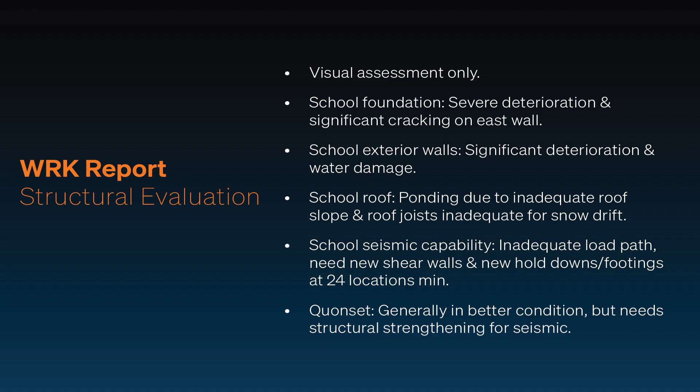And then the Quonset hut, again, is a visual assessment. It's in slightly better condition, but still leaves a lot to be desired for seismic engineering.

Okay, then we got a hazardous materials report. This was just done this year in August, September. Not a lot of great news here.

As for a lot of old buildings, the mastic in the flooring all has asbestos, so all of the flooring has to come out. The roof has asbestos, so the whole roof has to get replaced. The drywall, the texture, the tape, the mud compound, it all has friable asbestos, which I found surprising, but that means all of the walls have to go. All of the drywall's got to go at minimum.

And the exterior walls, again, with the water intrusion, there was a lot of visible mold. So even if we could save the drywall, we'd have to remediate it. If we can save the studs, it all has to get remediated. It also adds risk - mold is not terrible to get rid of, but you have to get every little last mold molecule, and it's really difficult to do.

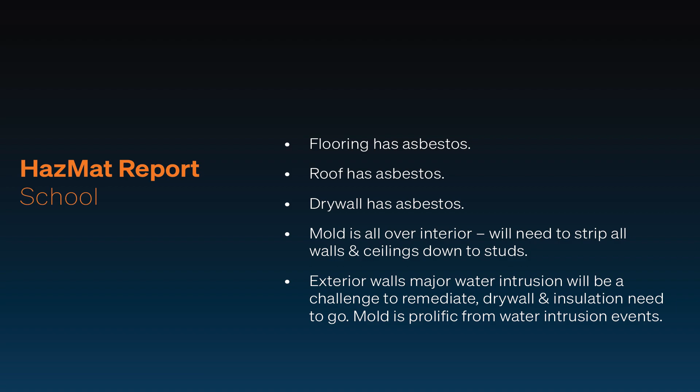And then the Quonset hut, similarly, we found asbestos in the silver paint on the roof. If you noticed, a fence went up around it recently, and that's due to the results of that report. It is friable asbestos, so as a caution, the city has put up a fence.

We're working with our consultant and DEQ to figure out, do we have to abate this immediately right now and remove the roof, or can we wait a couple months while we finish the design and figure out what the plan is going to be. So the fence is up as a precaution to just keep people out of the zone where that paint is.

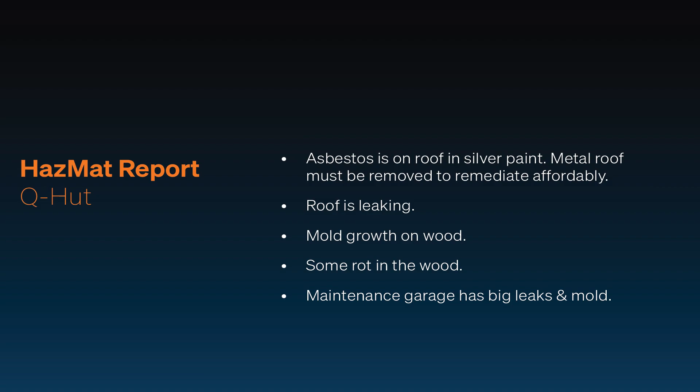Again, our roof is leaking there. There is visible mold growth, there is some rot, and then the maintenance garage part of the Quonset hut is in worse condition, has more leaks.

Okay, this is a different report. This is MTI, Materials Testing Inc. And they came out and did some testing on the concrete, and they go a little bit more in depth than just the visual assessment, but it wasn't destructive testing. They don't go in and take big chunks of concrete back to a lab and test it. We didn't take that step.

So what they found, again, kind of backs up what we found in the WRK report - lots of deterioration of the concrete. We have seen some differential settlement, which is not good. That means the foundations are moving opposite of each other in different parts of the building, or one area is settling compared to another.

We found there's a CMU wall that's cracking. So then they do this hammer test, they call it a Swiss hammer test. It seems a little silly, no?

Sorry, this is the carpenter's hammer - the carpenter hammer, oh I got you. So they literally go around with a hammer and they tap, and how it sounds can sometimes reflect the quality of the concrete - if there's voids in it, if there's deterioration, like if there's rebar that's rusting inside, it has this hollow sound. It doesn't sound like it's something that would work, but it does. I've seen it myself. So they can learn a lot just by tapping on the concrete and listening to the sound it makes. It's crazy, but it's true.

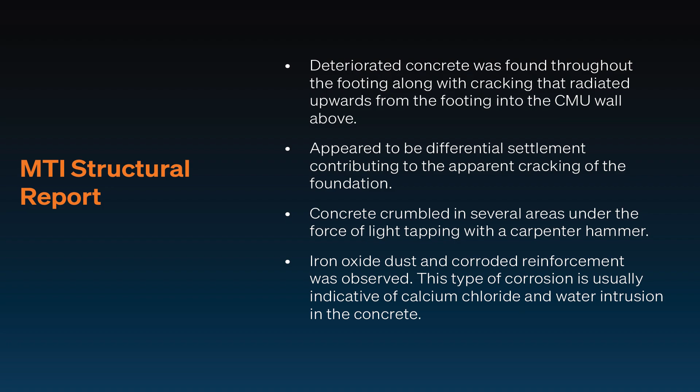Similarly, you can see here that 90% of the bar was lost. That's a lot of rust. You can imagine how long it takes to rust through an entire piece of rebar. So they saw that much deterioration in some locations. There's the Swiss hammer test.

So again, the minimum strength of concrete we generally use for buildings is 3,000 pounds per square inch, 3,000 PSI - that's generally bare minimum. Frankly, modern buildings, it's almost always at least 4,000 these days. And as an ex-structural engineer, I would be fine if a sidewalk was 3,000 PSI, but for a building and a foundation, you often want it to be higher.

The results of this were that a lot of it, when they did this test, was even below 3,000. So what we found is a large amount of the concrete just doesn't even meet the bare minimum standards for a sidewalk.

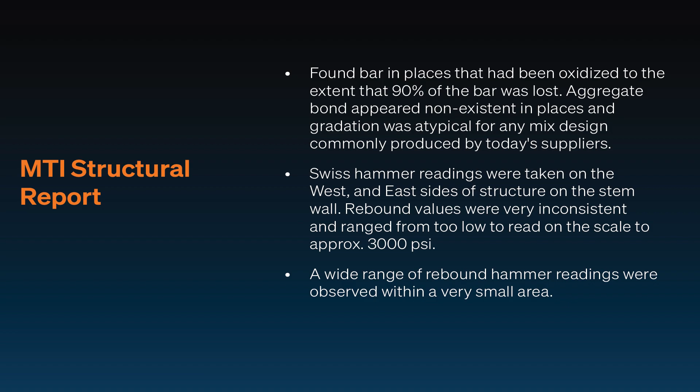That brings us into the geotechnical report. We just got a draft of it 2 weeks ago, and it was finalized last week. We're still trying to process and understand some of the information in it.

You might have seen they brought a drill rig out to the site. It broke down 3 times, otherwise we would have had the report sooner. They drill borings down pretty far, maybe 100 feet, I'd have to look that up. They did 5 locations on the site, then analyze the soil at each depth to understand its capacity to support a building.

What we found is we have a risk of liquefaction 30 to 40 feet below grade. That means in a seismic event, when the ground starts shaking, there are air voids in the soil profile that allow groundwater to start moving up, and now your dirt, which was solid, becomes soup. It is not good. I don't want to scare you, but it's a new item we just learned about.

What it means is that for the police part of this building, which has to be risk category 4, we cannot use simple spread foundations, which is ordinarily just digging a shallow hole and pouring in a blob of concrete with some rebar. For the police station, in order to get past this liquefaction zone, we're going to have to do these auger piles.

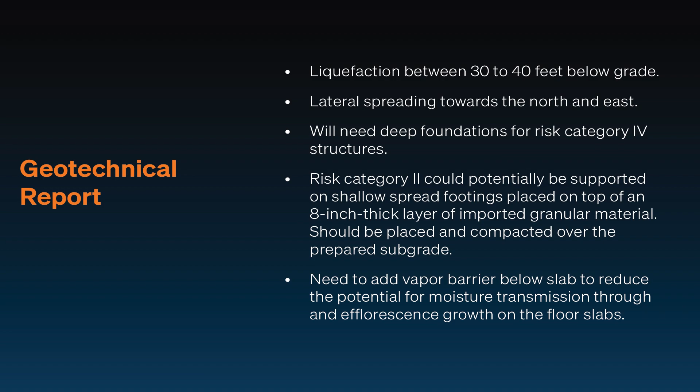And then lastly, there's no vapor barrier beneath the slab. Again, this wasn't done in the 40s. It's in every new building we do now, and it probably should be. So that's another element of why trying to reuse the slab is not a great idea.

More on the geotech report, summarizing that we need quite a big lift of compacted gravel below the footings, which we don't believe is there. This also dials in some minimum dimensions of what we think the foundations need to be, and how deep they need to be below grade.

I don't think we know precisely where the bottom of the footing is in the existing buildings. We do in some cases, where we have limited drawings that show it, but we don't think it's necessarily 24 inches below grade. So we also have a depth problem of where the existing foundations lie.

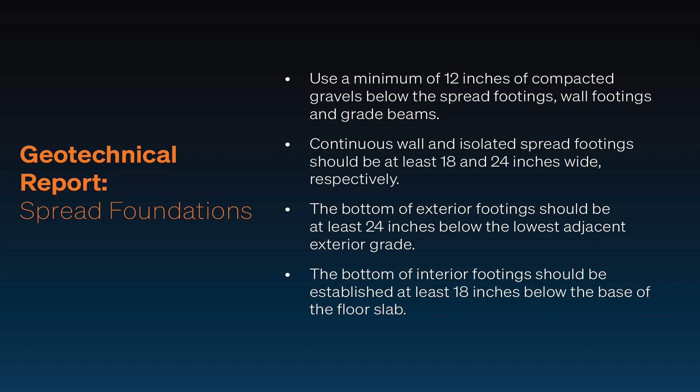Oh God, more geotech - I forgot there's this many slides on this one. This top note is just noting that liquefaction element. It complicates the foundation design; it's perhaps a slightly challenging site to design foundations for. We will need these continuous flight auger piles.

I haven't exactly done that one, but it's more like a spiral auger. They're used all over now - it's just a helical auger. It looks like something you'd put on a drill rig to drill out fence posts, and they're really easy to put in. Actually, it depends on the soil profile, how much rock you're going through - here it's mostly sand.

And it's not hard to get to 40, 50 feet. They're not outrageously expensive, as opposed to driven H metal piles that we do in the city, where they're banging metal into the ground. That's noisy, and so when I saw the word piles, I knew somebody would think it's the pounding kind. But don't be scared of them—it's pretty common in construction today, and most of the local excavators have the ability to do this.

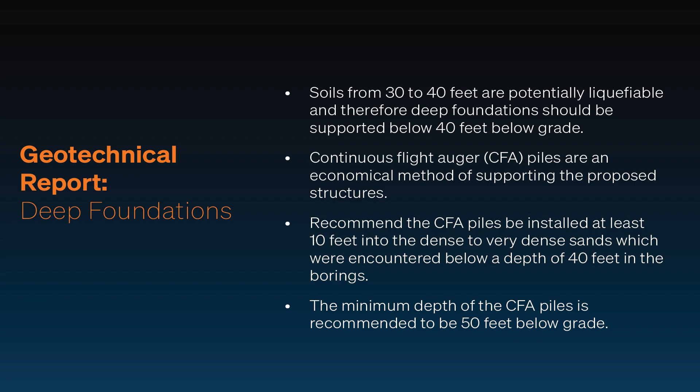Okay, sorry to interrupt. That's fine. So we've got the bottom note as the piles. We're looking at having to go down about 50 feet, right? So we don't have that in the facilities now.

That concludes a high-level summary of the technical reports. We will answer any questions on that later.

Did you want the fancy paper thing? Yeah, I want it now.

I'll just add that we will make the reports all available on the website. So they'll be all there if you care to read hundreds of pages of geotechnical reports.

Okay, so I have a really quick question. There was never a complete geotechnical report done before? Right, this is the first one that's been done on the site.

So when I came on, the team asked me to take a drive out there and put my builder eyes on it. I feel like I'm a good builder—I'm by far not the best builder ever. I think I always like to take my crew out, take a look at things before we dig too deep into it, and try to do a quick visual assessment. What do we think about the structures before we do anything?

I will say that I know reusing the buildings is one of the many potential goals, and I truly believe that's the greenest thing you can do in construction. We talk a lot about LEED and all these other things. Reusing things should be a goal of ours in life, so I think as a premise, that's a good place to start. But then we went and looked at the building.

So this is the south side. I went around and put up letters and placards to talk about where things were happening. Obviously, you can see all that longitudinal cracking—that's getting air and moisture into the rebar. What really happens there is the foundation probably still has decent bearing capacity; it can still take a load vertically. But what it can't do is take a load horizontally.

So when wind blows against the building, how does it stay up? It stays up with shear, right? And shear is done in wood frame buildings with plywood and hold downs. You put up a bunch of studs and tack plywood, and they tell us exactly how to nail that plywood onto the wall—6 inches around the perimeter, 12 inches in the field, all that jazz. That plywood then adheres to the studs and makes it rigid, so when something wants to blow over, all those nails resist that wish to tip the building over. But all that load has to get transferred to the ground.

And when it hits this condition, it's compromised—it can't transfer adequately all those loads. We also put in hold downs, which are big metal Simpson brackets on the end of two shear walls, trying to hold the building from doing something like that.

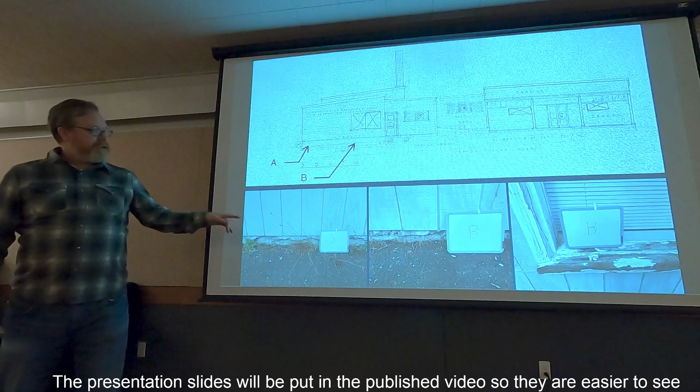So clearly, even on the south side, we've got two areas of cracks. We also showed some of the window sills are pretty well weathered and damaged. I'd say the siding in general—if this was just a building somebody asked me to walk up to—it's all compromised, it's pretty well past its useful life. If you put up cedar shingles on a building, I'm hopeful you'll get 40 years out of them. I don't know when the last time this was sided, but I think it served its useful life.

One other thing that happened a lot on this building is it was built very close to the ground. We like to have about 6 inches, more is better, between dirt and wood. If you live down on Horizon, that 6 inches is going to be gone in like 2 years with sand - it's just going to happen.

So what happens when you're that close to the ground is water wants to wick up places like this, and the lower row of siding is clearly deteriorated. Even worse, though siding can be replaced, is the sill plates.

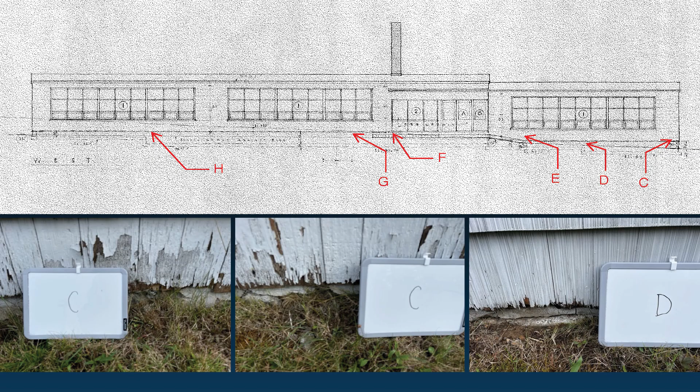Today, when we build something, we'll pour a footing, pour a stem wall, and put an actual foam membrane between the wood and the concrete, because concrete absorbs water and wants to wick into wood as well. Then we'll use a pressure treated layer. With all those measures, we can keep water out of the wood part of our building.

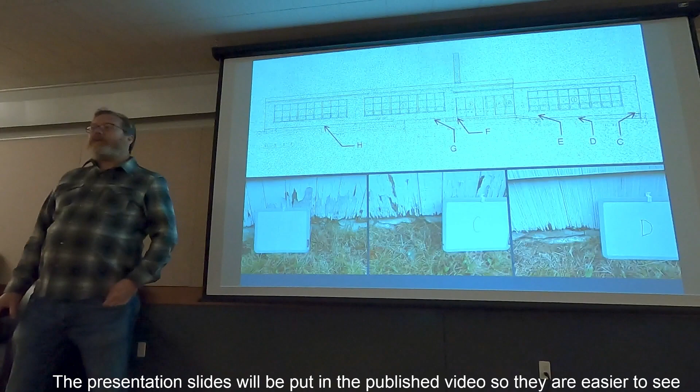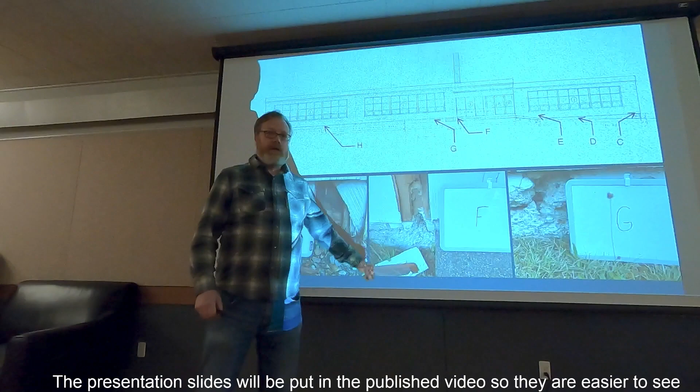In about as many places as I opened up, I saw rotten sill plates. It's pretty prevalent - you can see all the cracks throughout the building. Here's examples of the rot in the sill, and the spalling, which I'd say is a quality of concrete issue. Back in the 50s, whenever this was built, I wasn't alive yet, but...

The composition of concrete is a science. It's a mixture of rock, lime, sand, and admixtures.

Today, when we go build the footings for the new building, whatever concrete company - Moeller sand and gravel, A1 concrete - they're going to give us an actual mix design, and that goes to a structural engineer who approves it to say that concrete should have 4,000 pounds PSI bearing, with all these things in it, and they agree to that.

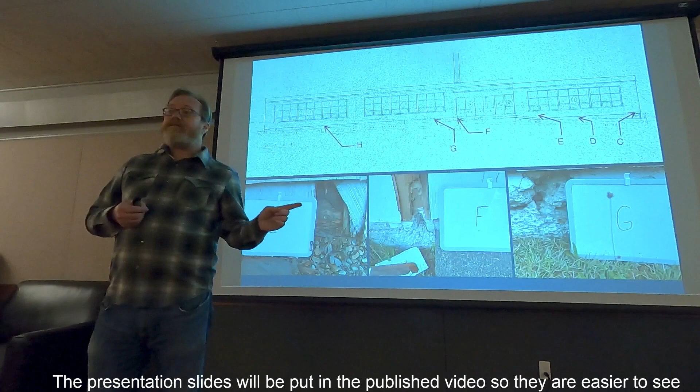Furthermore, when we pour that, we're going to have a special inspector out there with a little tube, and he's going to take a sample and a core. He takes 3 of them back to his lab, and breaks them at 7 days, 14 days, and 28 days, and he can tell us how strong that concrete is.

9 times out of 10, your first break is going to be over 4,000 PSI, and most concrete these days is hovering up in the 5, 6, 7,000 PSI range. My guess is that the quality of materials used without a precise science was inferior 50, 60, 70 years ago than it is today.

Window sills are gone - those are single pane windows. That does not meet today's energy code. So I would say windows are just a lost cause in the building, and there's a lot of rot.

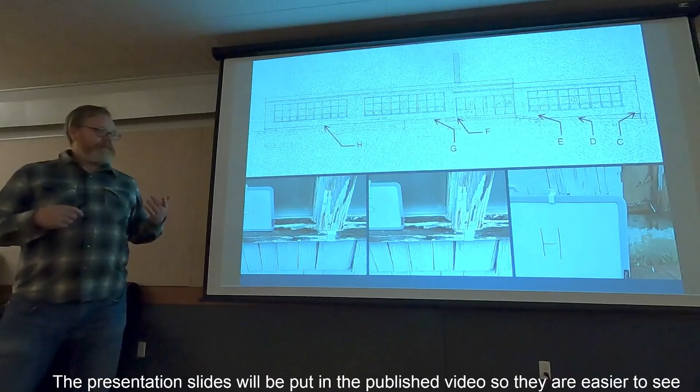More rot in the sills. You can just see, that's 2 or 3 inches from the dirt. Bugs get in there, water wicks up there - it's going to rot.

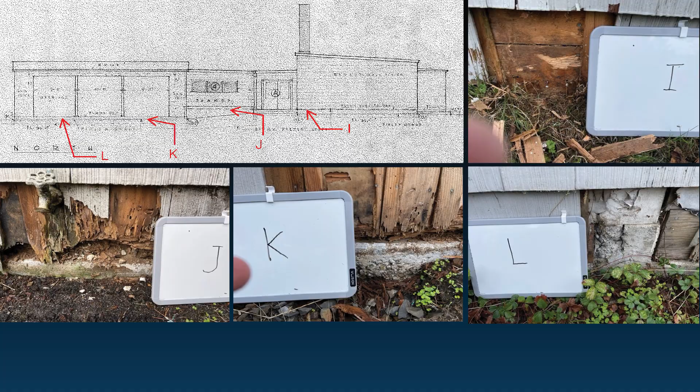This is the worst of it for some reason. Out on the east side, closest to the Quonset hut, there is a horrible longitudinal crack down the entire length of it. You can see the rebar. The moment rebar is exposed in our environment, it's gone.

I get nervous about putting rebar out on a job site for 2 weeks, much less many years. To further the conversation about what rebar really does, all concrete is strong in compression - you can put a lot of weight bearing on it this way, and you don't even need rebar for that. It's good at that. What it's bad at is tension.

It'll pull apart quickly. So what rebar does in the case of a footing is act as a beam - the footing wants to bend like the shape of a banana, and that rebar, if adhered to the concrete, makes that composite section very strong. The moment you lose adhesion to the concrete and or compromise the steel, you've lost that beam mentality.

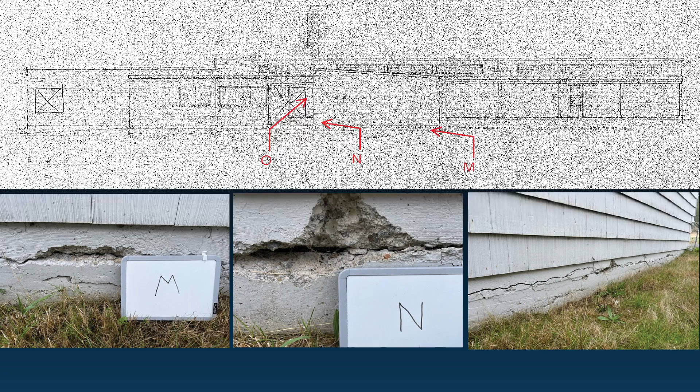So it's still holding the building up well, but it's not flexing well. If someone were to ask me to look at this building without knowing any of these reports, I'd say the concrete's gone - that's just my personal professional opinion. Are there elements of it that could be salvaged? Absolutely, but it all starts at the ground, and that's tough in our case.

A couple other things - the electrical, a common problem around here, our meter bases rust. We try to get stainless meter bases, but they're becoming very hard to get with the current pandemic climate. Obviously, you'd want to get all those panels inside, have one meter base, and have it be stainless.

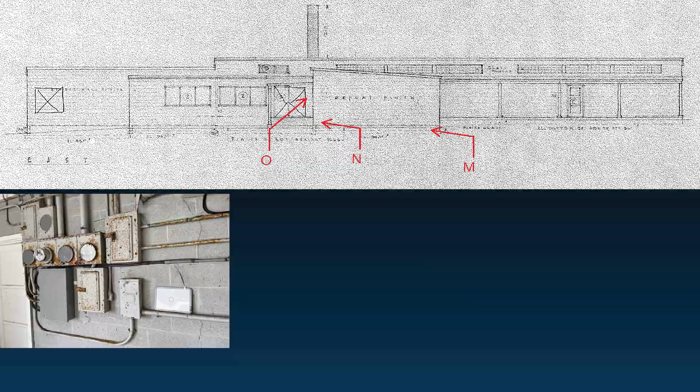So that's Jason's thoughts, and I'm sure there are opinions about that. But Chris did a really great job to kind of summarize everything we've talked about. There's 4 reports, our thoughts, and so we're going to go through that building, the old elementary school, piece by piece, and kind of show you what's left of it.

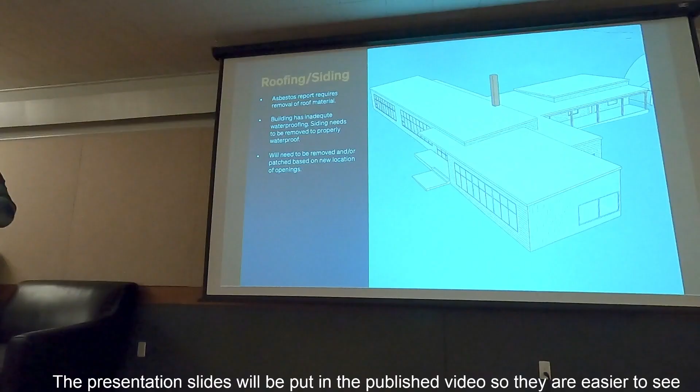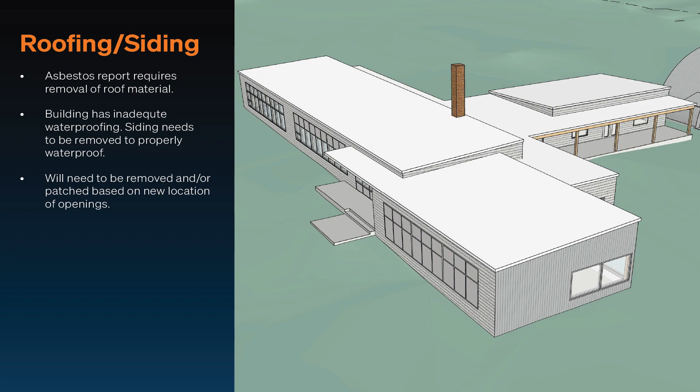So we know that the roof has asbestos - the entire roof has to come off. We know that it was poorly waterproofed, in other words not much of a weather barrier, no flashings around the windows, things we do commonly today. And the windows will need to be removed and possibly moved in the case of a new design. So take those 3 elements out, and you're left with a wood box.

Windows are single glazed, leaky, they do not meet energy code. Clearly, you're going to burn as much energy trying to keep that building occupied as you would buying better, brand new modern windows. Windows gone.

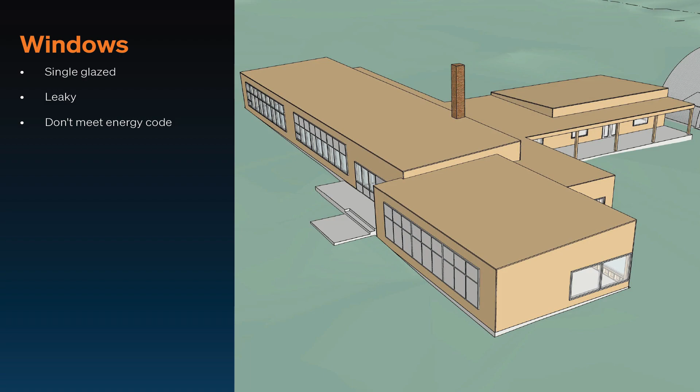The sheetrock, sheathing - so a lot of times back in the day, and I haven't looked at all the sheathing, but they would use boards as opposed to plywood. Plywood wasn't prevalent, I'm guessing, at this time. And those boards in today's world are not an adequate shear resistance force.

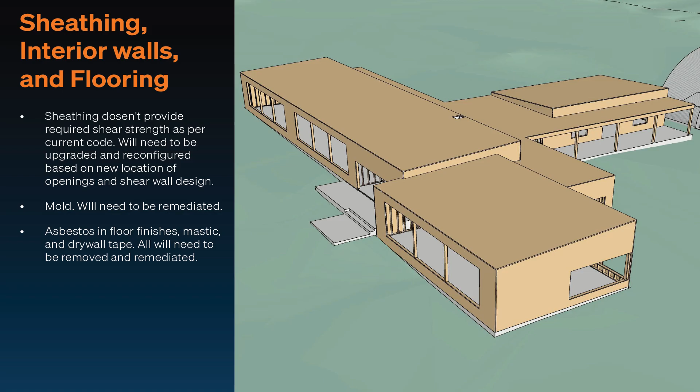We've talked a little bit about the mold, and here is kind of the final nail - there's asbestos in the sheetrock and in the flooring. So with all that gone, we're looking at a building with a bunch of studs, right?

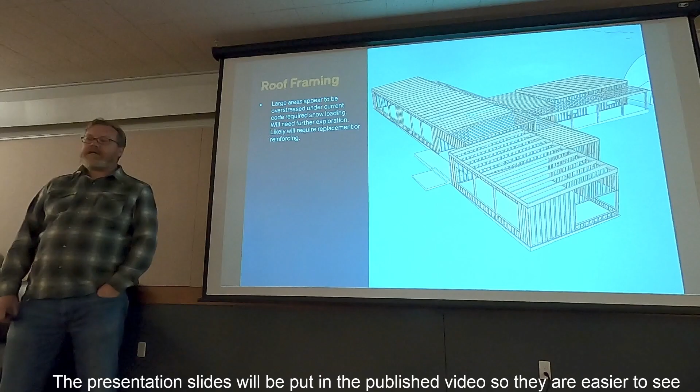And we specifically asked the engineers about the roof framing, thinking well maybe there's still something to be salvaged here. It is overstressed. There are ways to re-strengthen a roof - we could sister joists in there, but as we know, the concrete's bad.

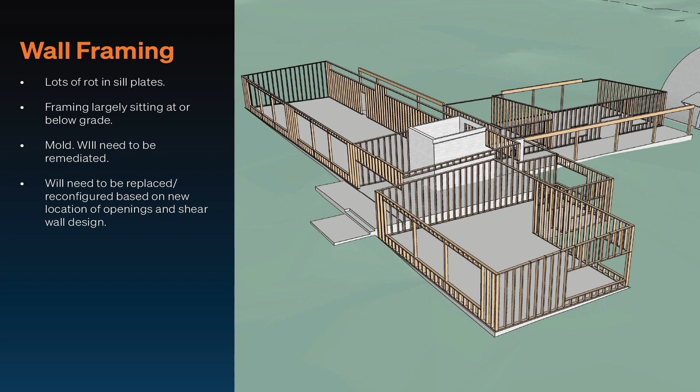So we have, as you've seen in pictures, lots of rot in the sill plates. The framing's so close to the ground that it's going to be problematic. There's mold, and we've talked about the need for possible new window and door openings. So all those studs get removed, and we're down to the foundation.

The stem walls are deteriorated in many places. Anchor bolts are rusted. We have a 3-inch slab, no vapor barrier. It's pretty well cracked. We would have to, if we were to salvage this, come up with a pretty extensive addition of footings and extra foundation supports.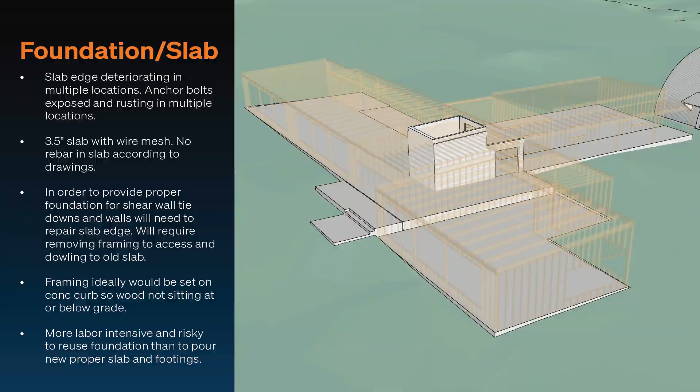The framing would have to set on a concrete curb, and not be at grade. And it's always more labor intensive to reuse that foundation - not always, but in this case, very much so.

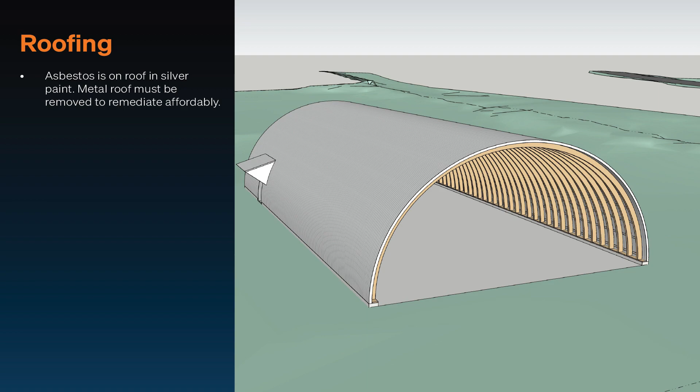The Quonset hut - asbestos in that metal roof. So the right way to take that off is to take off each roof panel piece by piece, haul it up to Hillsborough to a hazmat facility.

Framing, there is the rot in the sills. So even if the hoop trusses are in good shape, having rot at the ground makes it very challenging to work around it. A little bit of mold here and there.

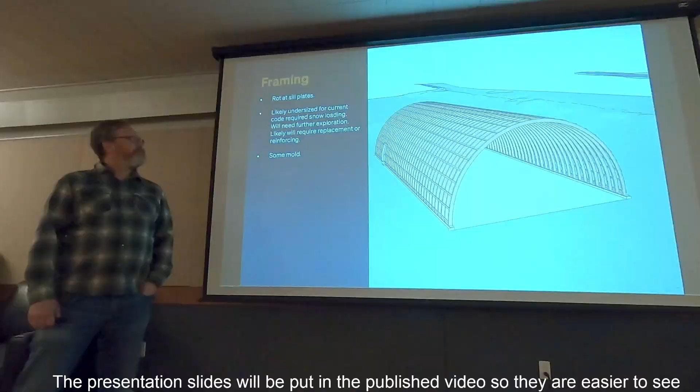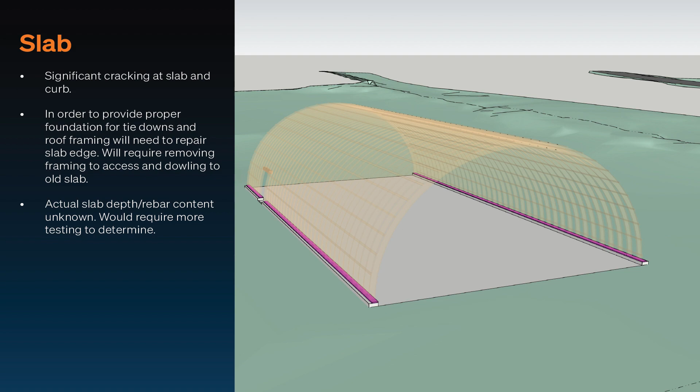Slab's cracked, I'm sure there's no vapor barrier in that. We'd have to do some coring and exploration to understand what the real depth of that slab is. And we would have to come up with some ways to hold that down to the concrete with hold downs, steel straps, whatever it may be. That's what's left.

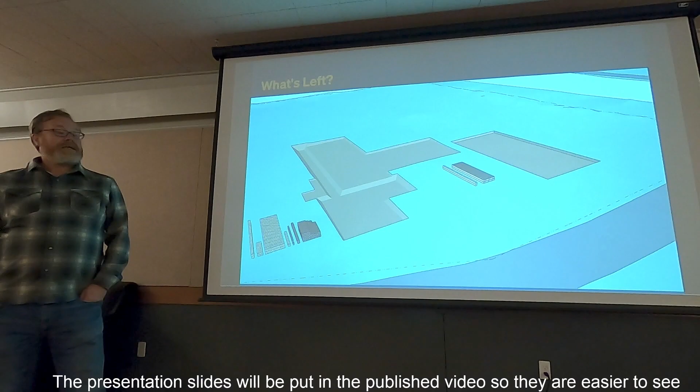So the question is, should we salvage some studs or not?

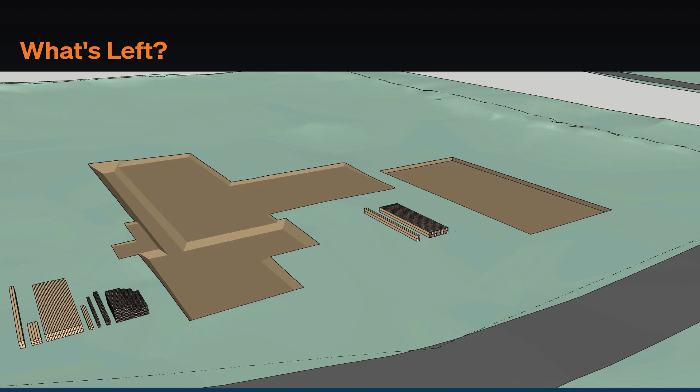This will be most publicly funded jobs, and this one I'm sure will follow those same guidelines, are prevailing wages. Prevailing wage for a carpenter is around $65 an hour. Carpenters average, I'm going to say, in the area $30 to $40 an hour. So you can almost double your labor cost in doing a prevailing wage job.

It's a great thing for our carpenters to be making higher wages. I think those dollars get put back into the community, but that's just a statement that the labor to do a prevailing wage job is very high.

So I ran through a quick estimate, just an estimate, I'm sure we could shoot 1,000 holes into it, but I wanted to take a quick look at mass demo of that whole thing versus what if we try to salvage some of it. Just quick numbers, talked to Erickson as an example. We thought we could tear that whole building down for $60,000. Building's gone, we're starting from scratch.

Now we need to replace the studs. Believe it or not, just the perimeter studs around that building are pretty affordable, $3,500. Wood's back down in the lower regions. That's great for our future project. There are many things that are not, but wood is one of those things that's come way back down.

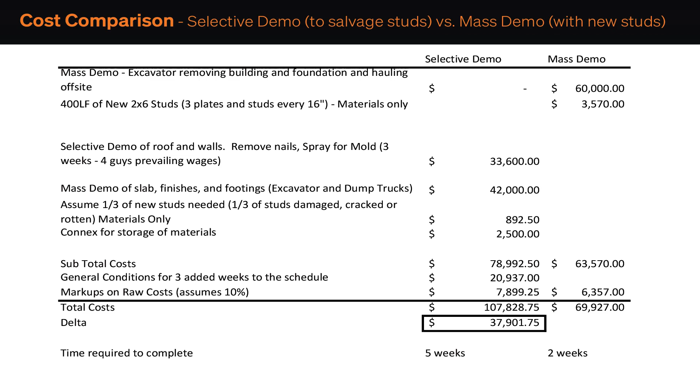The remediation of the asbestos has to happen either way, so I took it out of the calculation. Before we ever even walk on site to either tear it down to the ground or selectively tear it down, we have to hire a specialized contractor that only handles asbestos removal. That thing will get tarped and tented, they'll all be wearing bunny suits with masks. We'll put a negative air machine in there, and they'll take out every piece of drywall, every piece of flooring, all the roof, the steel panels off. It's a big number, but it's not included in either side of the equation.

Well, that would be good to know that number, because taking it out is one part of it, hiring the specialized contractors, but also the disposal has to happen at specialized facilities. Absolutely right, yep, it's a big number.

So what do we... do you want to talk about that, Jesse? Yeah, that'll be part of the overall budget. We just got Jason under contract last week, so there wasn't really time to put together a full cost estimate for an entire project. This is an example of just one part of the overall budget, but we still have to show you the whole budget for the whole project, and the asbestos removal will be part of that. Like Jason said, it has to happen in any project we do, and it's a sunk cost no matter what the project is, so it's not reflected here at this time.

This exercise is a bit academic, granted.

I've been estimating for about half my life, but there's always errors in estimates. I think there's always things you can perfect. I wanted to give my estimating background on what it would cost to salvage those studs versus haul them off, and I think it's somewhere in this vicinity.

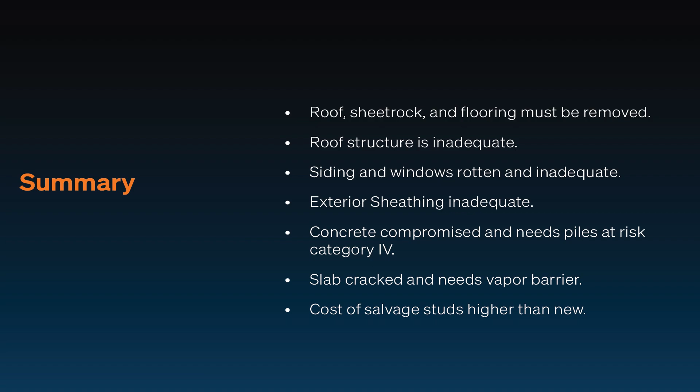Right now it's looking like new construction is the most cost-effective option for us. So what we wanted to pose to you is the next question. That's our kind of summary. Let's pretend I just did all that. Should we keep pursuing the idea that we can rebuild the school or the Quonset hut? We want to be cost effective, and it feels like we're spinning our wheels and starting to waste money the more we look at it, and we don't want to do that.

This is a community decision, a city council decision. Do we keep pursuing this, or do we change our focus and say we've done the due diligence, we realize now with all the information that new construction is the most affordable, and should we pivot to that and just keep working on that scheme? I think that's a discussion we should be having as a group, and that's what we wanted to discuss.

I'll add to that. To reuse the building is to rebuild it. So does it make sense to rebuild this building in its current configuration and fit the program into it, or get rid of that constraint? I think that's the way we're seeing it, because we could maybe keep parts of it at some greater expense, but the foundation needs to be replaced. So that's where we are, and as Jesse said, this is not our decision to make. We're going to deliver for you guys what the city and the city council asked us to do. But this is kind of where we are now.